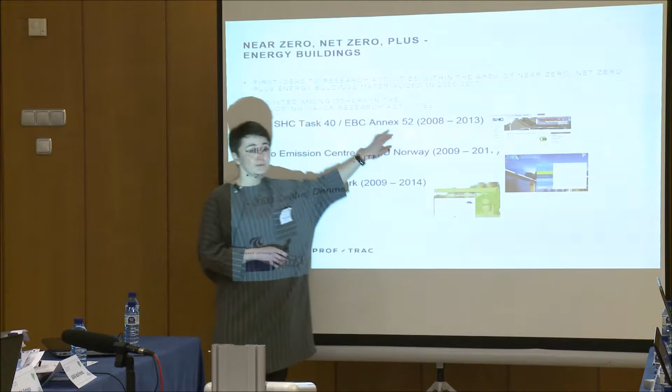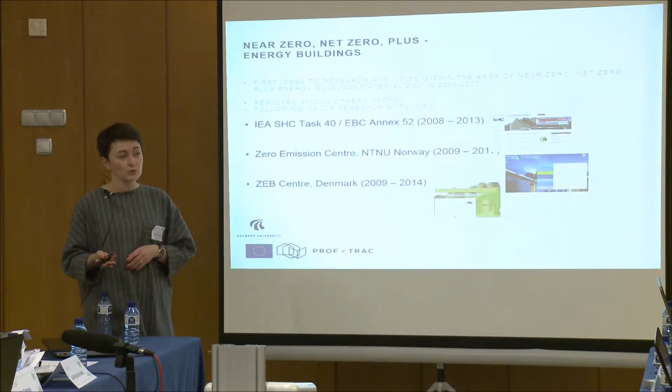In this annex, one of the questions raised was: what do we understand as a nearly zero energy building? We can speak of many different types of buildings that produce renewable energy, whether electrical or heating energy, and can we compare those? What do we understand by zero energy building? How close to zero should we be? Is it a building that produces energy, or a building that doesn't use any energy? Is it a building producing energy on site, or can we count energy produced by a windmill placed somewhere far away in the fields?

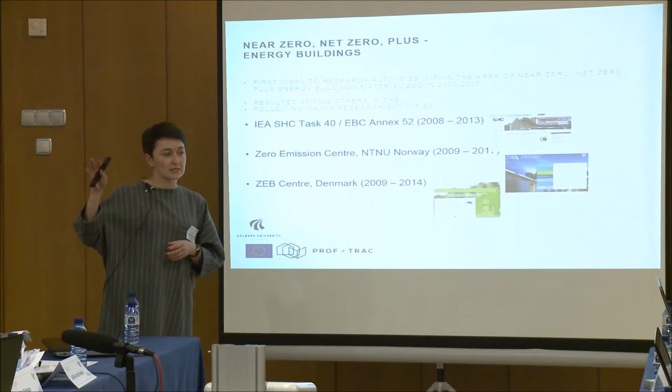Many of those questions were asked within this Annex 52, and one of the outcomes of this work was to make a definition of nearly zero energy buildings.

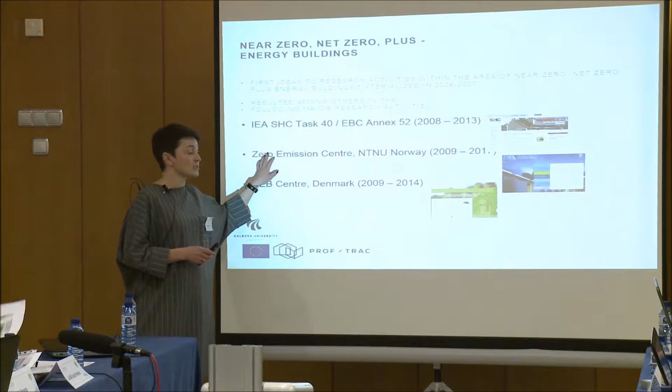As a result of this work, we started a collaboration within the Zero Emission Center in Norway. This center started in 2009 and is still existing, but it will finish in 2017. A corresponding center for zero energy buildings in Denmark also started in 2009, but it's now closed, since 2014.

The difference between those two is that in the first one, the focus was set more on the zero emission center, so we speak of the emissions of the building. In Denmark, we have been focused more on the energy.

In this case, in Norway, are all the buildings near zero? No, not because all of the buildings are nearly zero, although this is the goal. But if you use the electricity in Norway, they don't have CO2, it's hydropower.

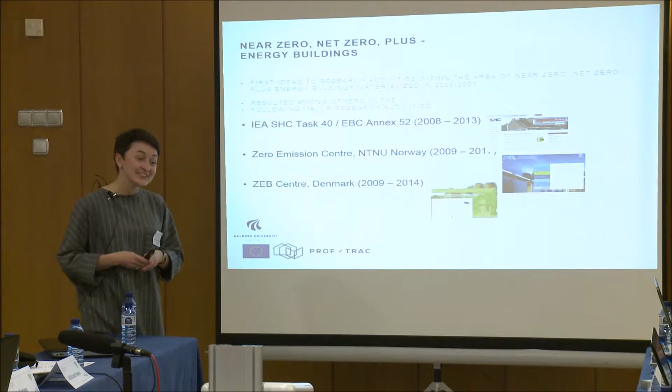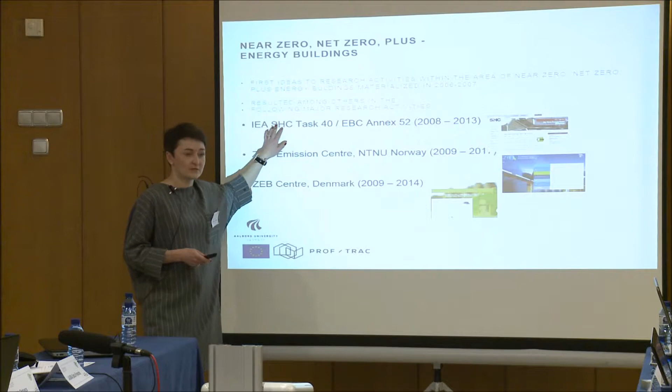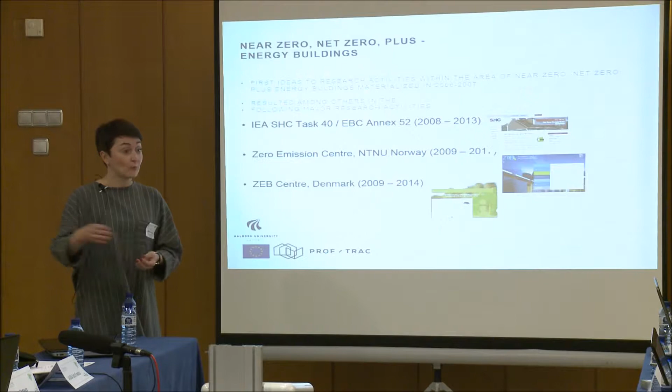Yes, that's true. But the question is whether a building that has huge energy spendings can be considered a nearly zero energy building, although you compensate for all of the energy by renewable sources. This is one of the discussions held within the annex, and one of the conclusions was that a building with high energy spendings is not nearly zero energy, even if you can compensate for all the energy you spend.

So the idea is, what do we need to do if we want to get a nearly zero energy building? First of all, we would like to reduce the energy need in the building. Then, in most cases, we will still have some energy spendings, and those have to be compensated or produced by renewable energy sources.

And then how do we cover, how do we compensate? If our building uses, say, 10 kilowatts of electrical energy, can we compensate with heating energy? How do we deal with that? So we need to find a way to account for the energy. Do we account by primary energy, by electrical energy, or what is the other way of accounting for the energy?

And finally, we also need to consider the embodied energy in the materials of the building that we use. How do we deal with this part of the building?

So once we succeed in building these nearly zero energy buildings, what we get is a building that has rather low energy use. We have buildings that are consuming some energy, and in many cases that would also be a building that is producing energy, what we call the prosuming buildings.

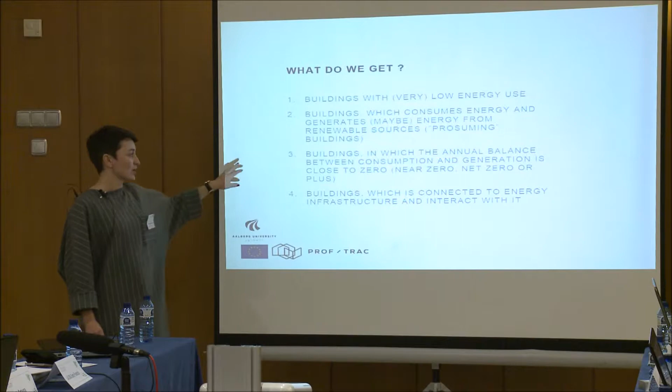We also get buildings where, expectedly, the annual energy balance goes nearly to zero. This annual energy balance is the outcome of Annex 52, that when we account for zero energy buildings, we account on a yearly basis. We could have considered accounting on a monthly or daily basis, but the conclusion was that the yearly basis was the most appropriate way of accounting for the energy.

Can we interact with it? But I think we also have to speak about power, peak power. Yes, yes, also that one. But I think we will discuss it to some extent.

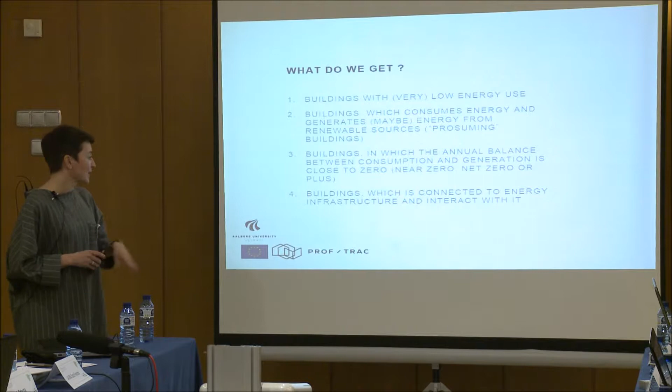And the final part here is that if our buildings are prosumers, producing energy, there are two possibilities: either it's a building disconnected from the grid, or it is connected to the grid. If our building is connected to the grid, then it becomes a very important part of the overall energy system, and we cannot discuss a building as a standalone unit. In this case, we'll have to discuss the building as part of a larger interface.

The challenges related to zero or nearly zero energy buildings are: how do we determine the balance between energy production and energy savings, and how do we deal with that? How do we design buildings that interact effectively with the energy system and the network, and how do we design buildings that can help our energy grid? What do we understand by that?

We actually want our buildings... it's not a fire alarm, I guess. Oh, it's done now.

Another aspect of all of this is actually designing our buildings to be energy flexible, so that our building can take some of the load from the energy grid, and in this way release certain possibilities such as energy storage.

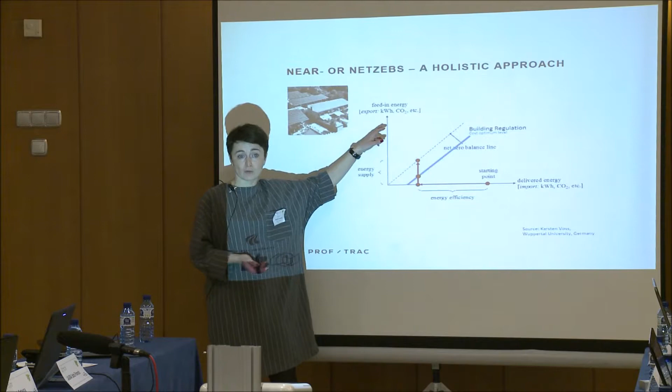This is a discussion we've had just before, where on the x-axis we can look at the delivered energy, or the energy demand of the building, and on the y-axis is the production of renewable energy on the building. So in this case, if energy use in our building is rather high, that would also mean the production of energy should be correspondingly high. If we optimize our building and reduce the energy demand, we will end up with rather small energy production.

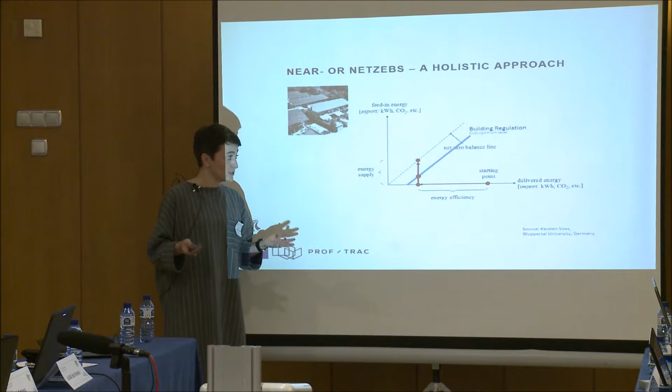Of course, we don't do this because it would be very difficult to compensate for the high energy demand, as it would be quite expensive. In some cases we do, but that's not the optimal situation.

Studies have shown that it makes sense to optimize the building to a certain level before we apply renewable sources. For the example of Denmark, it's set by the governmental building regulations, where a certain line is drawn that defines the optimal life cycle cost, or investment cost, for consumers to go for this level.

So we optimize to a certain level. We are not going all the way to zero, because if you go all the way to zero, it will be quite expensive. But if we stop at a certain reasonable point, then with a reasonable cost we can optimize our building and compensate for the energy use using renewable energy sources.

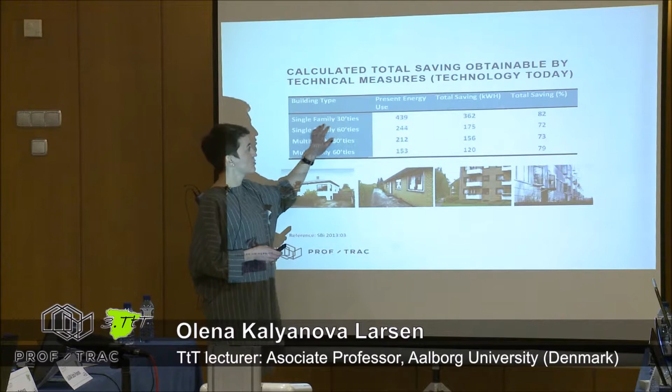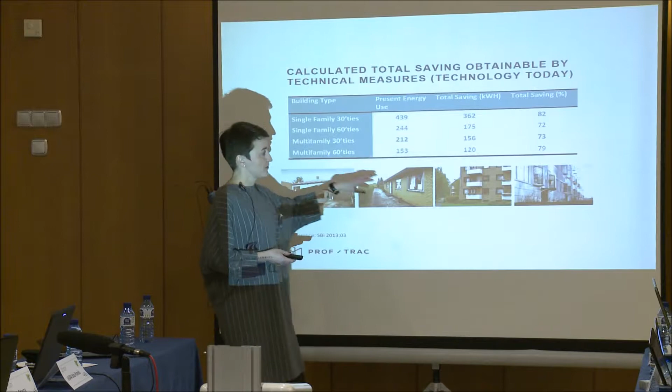Looking again at the Danish example, we have a lot of different buildings from the 30s, 60s, and 80s, and some calculations have shown that if we look at single family houses from the 30s, we can expect 82% energy savings if we renovate those buildings. The value is very similar for buildings built in other years. For example, buildings from the 60s are also very poor, and they can be optimized and renovated.

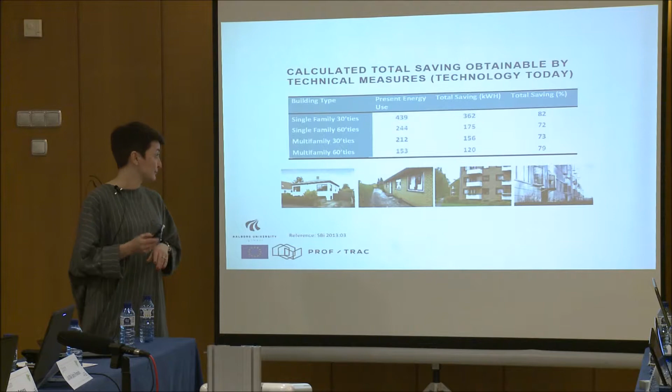Oh, this is not very good. Then I'll try to explain.

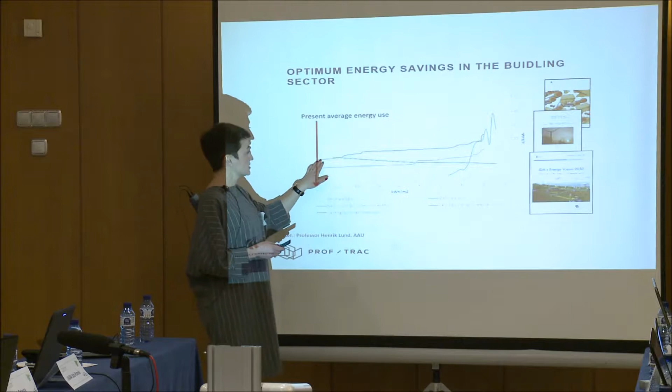At the moment, a lot of buildings in Denmark use around 130 kilowatt hours per square meter, shown by the orange line with a certain cost. If you look at the new built buildings, that's the green line.

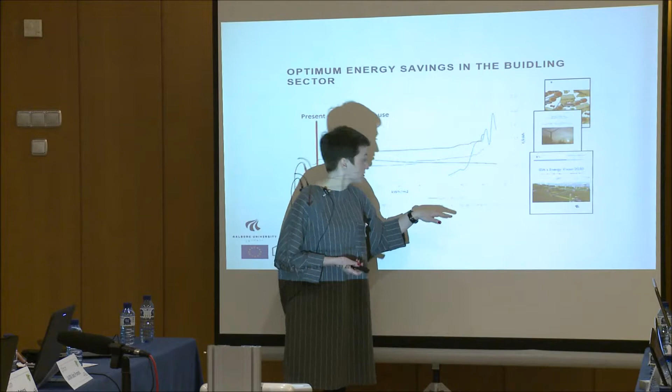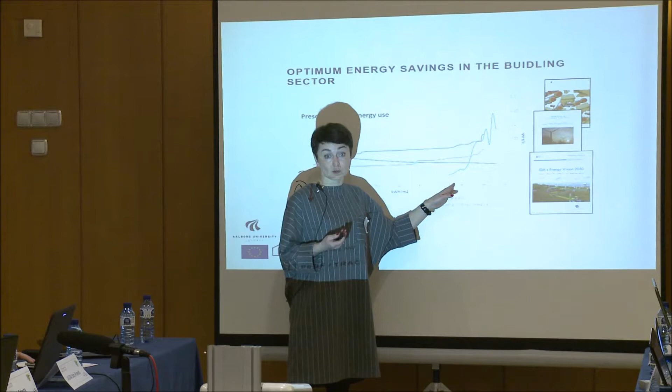There we start with energy use at around 70 kilowatt hours per square meter, and we can see the new buildings are rather cheap to build to achieve this low energy use. But if we follow the Danish regulations, which have been sharpened...

The expectations for energy use in buildings are now very, very low. So we have to optimize our buildings even further. Right now we are at around 20 kilowatt hours per square meter per year. But this doesn't come without a cost.

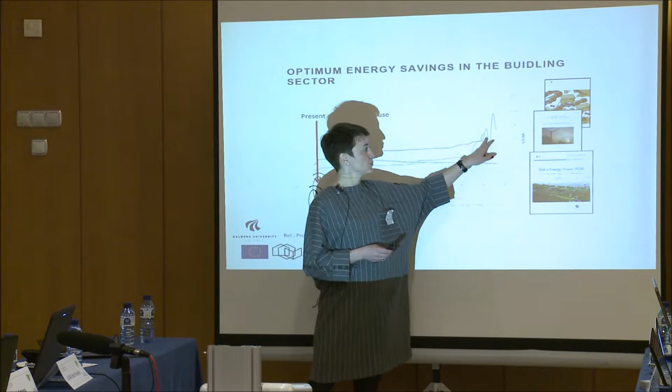You can see those peaks where our buildings become very expensive to build. This is because we have to use mechanical ventilation systems with heat recovery, which has a certain investment cost.

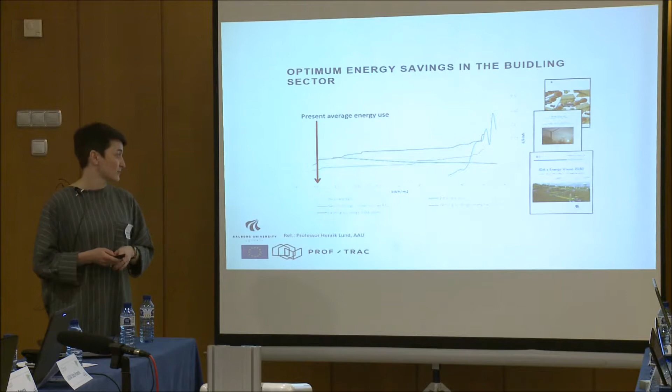This is an example of a case study, a building that had to be built in the city where I live. This was a building disconnected from the grid.

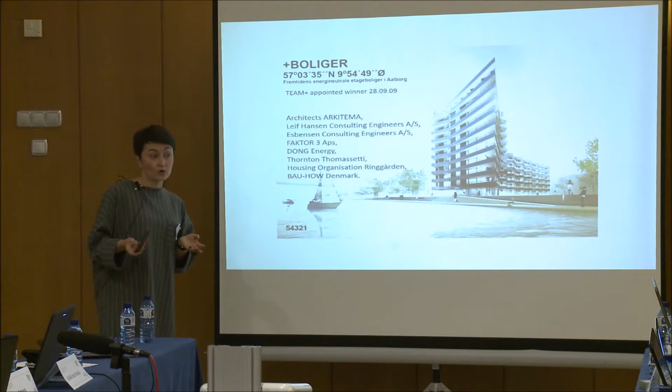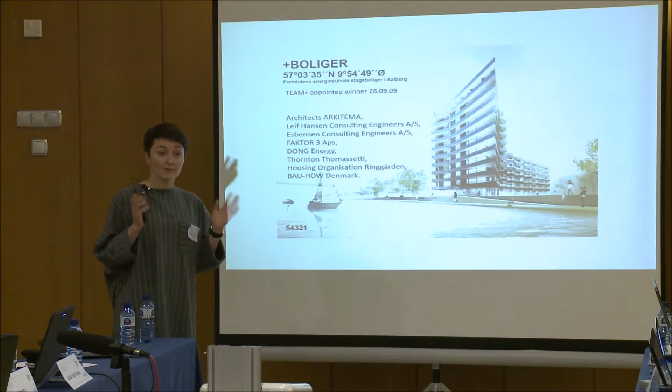Before they decided whether it had to be disconnected or connected to the grid, they did a study on the life cycle cost, whether we take different renewable sources and make the building fully autonomous, or whether we connect it to the grid.

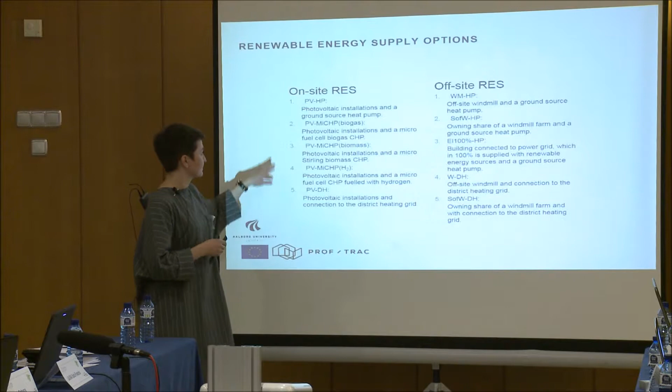Can you explain the different technologies? Those are over here, and they're also on the USB. But if you're interested in more detail, since this isn't work I did myself, there is a publication reference here that's already published, so you can have a look at it.

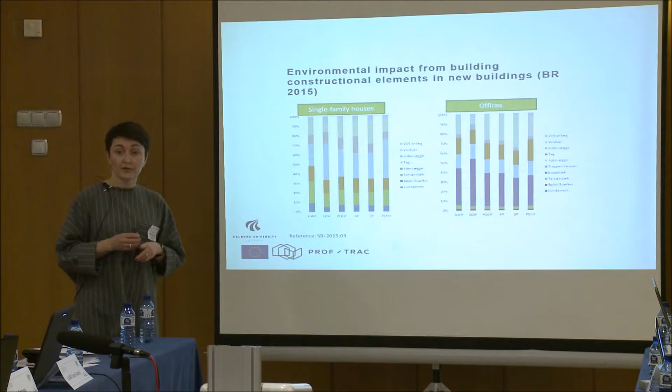Speaking of the environmental impact of our buildings, we can also look at different types of buildings: single family houses and offices. I'm surprised the picture isn't very good, but it worked last time as far as I know. The idea is we can look at the contribution of different building constructions, for example HVAC systems, windows, floors, etc.

Here you always speak about theoretical impact, always calculations. Yes, this is the calculations. No verification side? No, but there will be also some.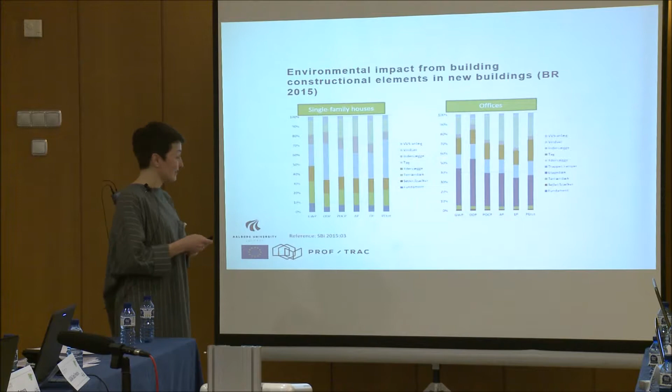In the previous slide, you have a winner. I was trying to say that there is no winner, because it depends very much, since this is done for the Danish context, and for the Danish context, the off-site production, etc.

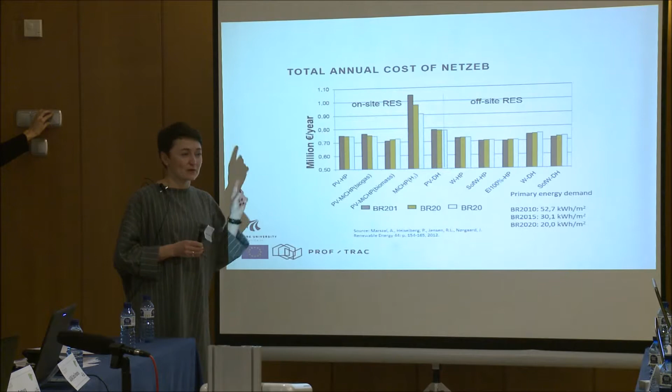Are you coming back to the same diagrams when speaking about the verification side? Not the same, because I don't have them, unfortunately. This building has a very long story.

This building was designed and all of this analysis was made just before the crisis. When they had to start building it, the crisis came and the companies involved simply could not afford it. So construction was cancelled, and now, many years after, they are building this building, but the site has moved to Copenhagen instead of Aalborg, in a few years.

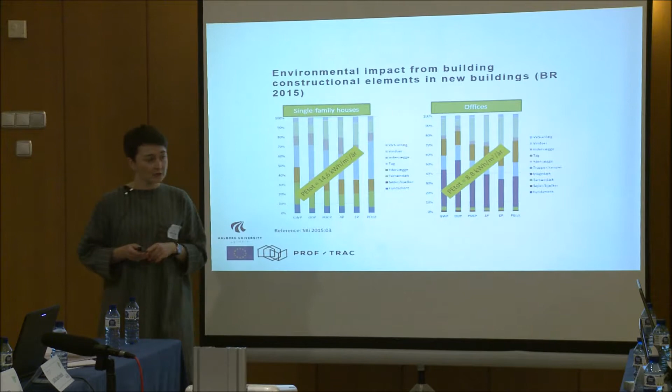If we look at the primary energy in total, we have the single family houses and the offices. The life cycle cost in the calculations for the single family houses seems to be much higher than it is for the offices. And that is one of the calculations made within this project.

And we do have to consider the life cycle cost. But as I said, the ZEB, or Zero Energy Building Center, has not been focusing in Denmark so much on the emissions. Sorry, here, when you speak about those numbers, are you talking about primary energy, electrical energy, or thermal energy? Over here is the primary energy for the life cycle cost.

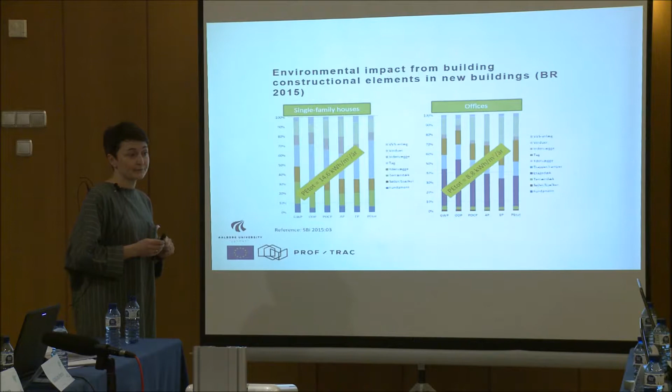And is everything included, for single family house - lighting, appliances, everything? In this one, as far as I know, appliances are not included. No appliances? No. Lighting? It's also still counted as appliances for the dwellings in Denmark. Yes, and this is, yes.

Some of the other challenges that we are discussing is actually how the buildings interact with the energy systems, if they are a part of the energy system.

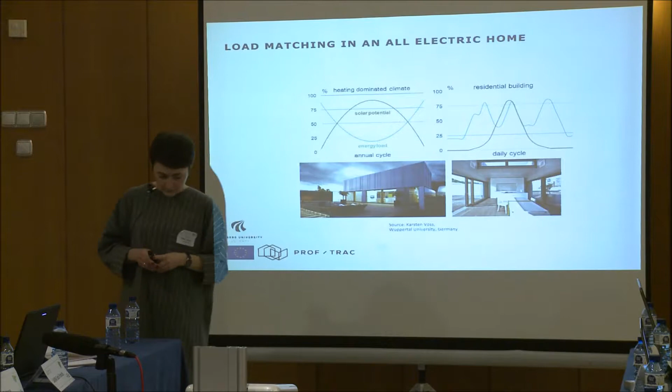Some of the calculations that have been done in a fully electrical building show that the building's annual cycle can look this way - we can actually produce quite a lot of energy in the summertime using the PVs, but actually the energy load in the summertime is reducing. But if you're looking at the photovoltaics on a daily basis, those are much better correlated to our daily cycle. Maybe not for the single family houses, but generally for the grid, the highest energy demand happens during the daytime, meanwhile at nighttime we are not consuming.

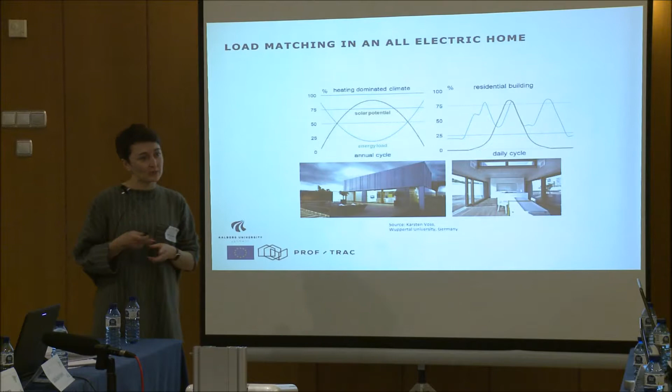Yeah, the business hours, of course. But in a certain way, if we speak of a building that is fully electric, we can compensate both for heating and cooling using the electricity, if this has to be considered.

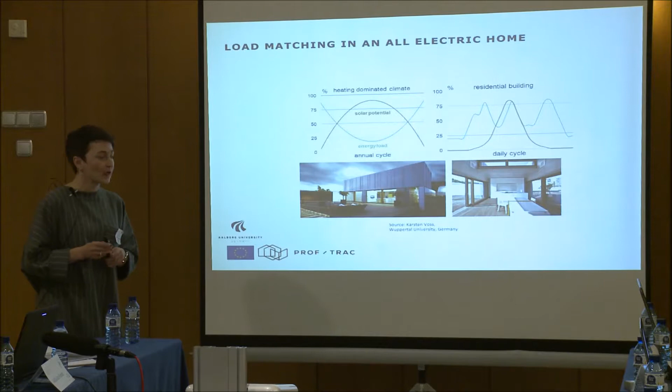This is one of the case houses which has been started by Karsten Voss from Germany. I think this illustration can apply for many places. And this is the case that I can speak more about.

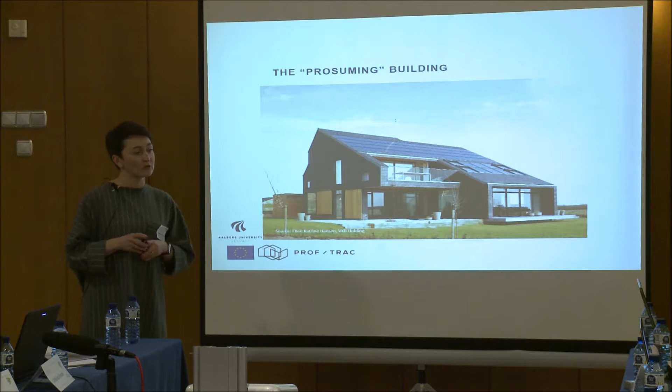This is the building, I don't know if you have seen it before, it's called Home for Life, or in Denmark it's called Active House. It's in a way a research project which is a collaboration between the industry and the universities.

This building was built some years ago, and the idea with this building is that it has a lot of glazing area, of course. It has a lot of control systems involved, so the occupants, when they live in this building, don't have to control a lot of things.

So the shading is activated according to the indoor air temperature and according to the daylight level inside. It is highly controlled, and some people who have been there think it can be too much, because you can feel how the internal shading moves, the external shading moves. But this building has been measured in many ways.

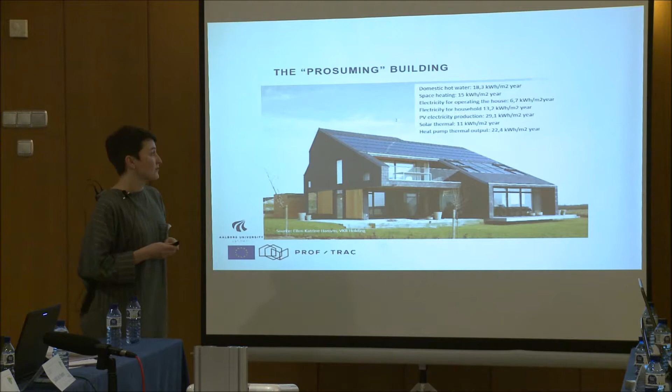So the calculation for this building has been made, and we have a certain demand for the domestic hot water, we have the demand for space heating, there is electricity for the operation of the house. Household electricity, in this case, is included, and we know about that one.

There is a production of electricity by the PVs. There is a solar thermal collector installed, and there is also the heat pump. So once the measurements have been done, we have the solar thermal collector, we have the photovoltaic system, and we have the ground source heat pump.

The building is connected to the grid, and actually two out of three parts of the energy has been, let's say, exchanged with the grid. These are the results of the measurements.

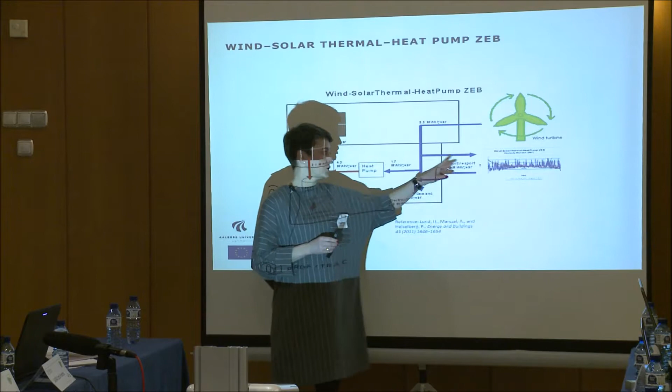Then some simulations were done to calculate what will happen if the solar collectors are replaced by a wind turbine. In this case, the calculations showed that the energy exchange with the grid dropped two times. As a result, for this building, the conclusion was made that the wind turbine is the better solution for this type of building. But this is, of course, only one case.

Yes, I know that there is a better picture of this chart on the USB.

Some of the discussions that have been made relate to wind generation, because when we generate electricity using wind turbines, we have very high fluctuations in electricity generation. Meanwhile, having solar collectors, we actually produce energy during business hours, where it is also most requested, at least for the Danish network.

One of the things that is very difficult to discuss is that we are used to looking at our buildings as a singular, standalone system. But if you connect them to the grid, they actually become an active part of our network. At least for Denmark, this has been one of the conclusions.

I'm not researching in that area particularly, but we have very good cooperation with another department that researches the network of the energy system in Denmark. They have been looking at the building as part of this active system, so actually we can use the building as a battery in a way.

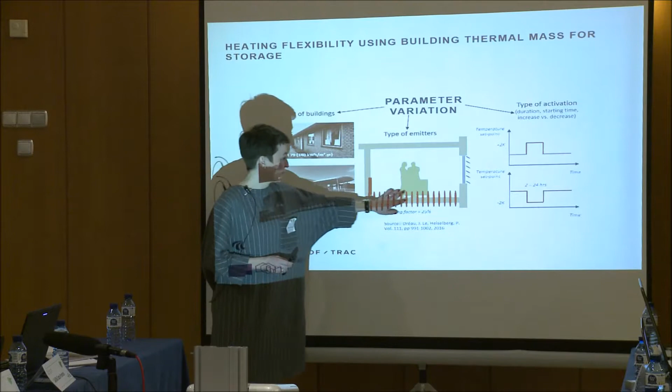So when we did the study, something happens with these charts - they change. What we are looking at is the building as an emitter or a collector, actually using the building construction as a possibility to collect energy.

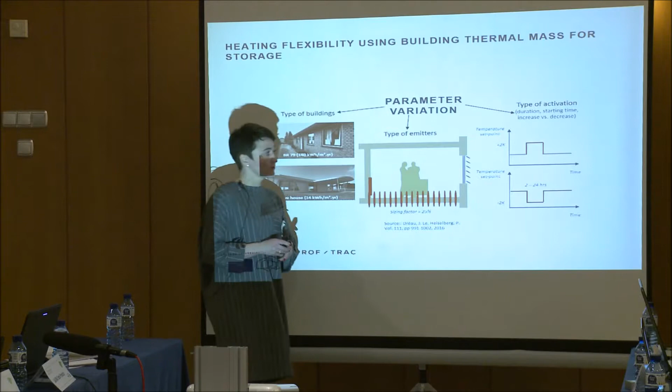This can be done by increasing the set point temperature inside the building at moments when energy is cheap, and reducing the set point temperature when energy is expensive. So when energy is cheap, it's actually the situation when we have too much energy in our network, and that has to be spent.

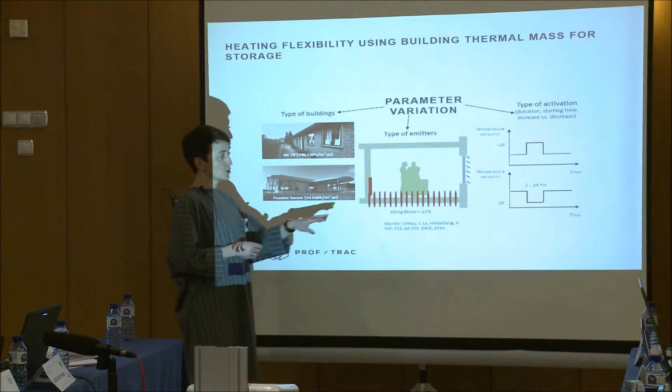And this is what we do - we ask our building to use the energy at this moment to maintain comfort conditions. Meanwhile, when we are not using the energy, we are also saving some money.

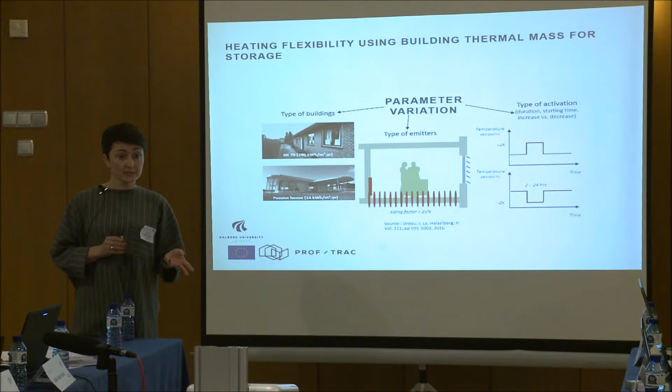These are the results of building simulations, not measurement results. We are looking at two types of buildings. First, a building built sometime in the 70s or 80s - this building has a very poor building envelope, with a lot of cold bridges, etc.

The other building case is one that lives up to the passive house standard, a building that has very low heating demand and a very good building envelope. Those are the two cases considered.

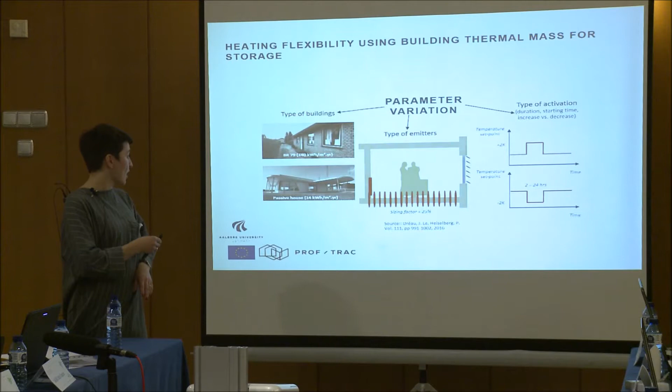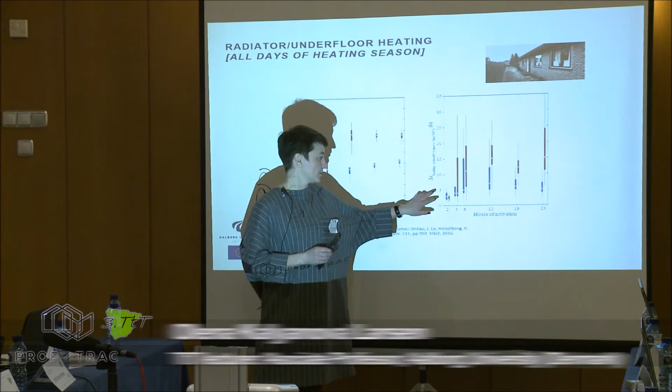These are the results of the simulations, and now I don't have my notes. We are looking at red and blue lines - the blue ones are the radiators, and the red lines are the floor heating. So what happens if, on the x-axis, we activate our floor heating or radiator for certain hours in order to store some energy inside the building.

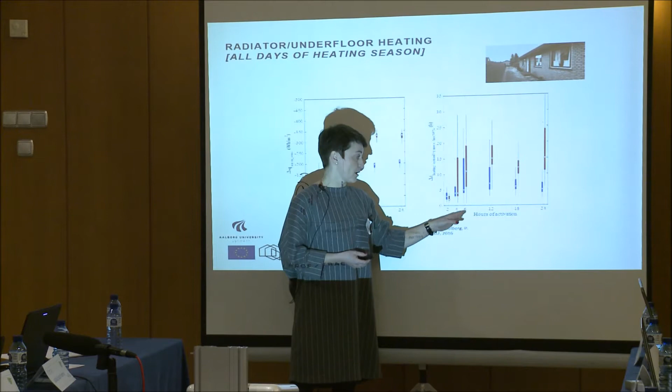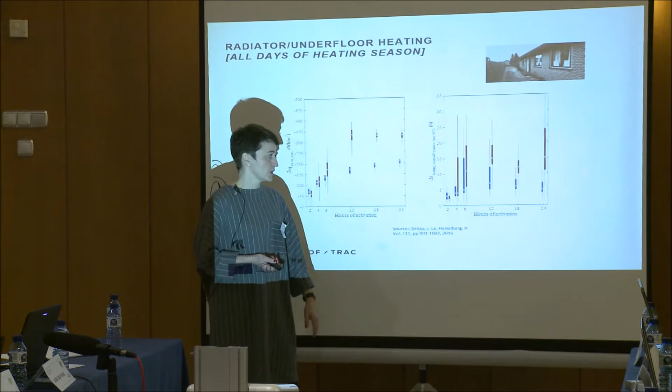For this old building from the 70s, if we activate the thermal mass for around 6 hours, we can see that the heating system can be switched off for a maximum of 5 hours. So actually we do not get much out of it. If we activate the thermal mass for a longer time, the performance - the time we can switch off our system - doesn't get much longer.

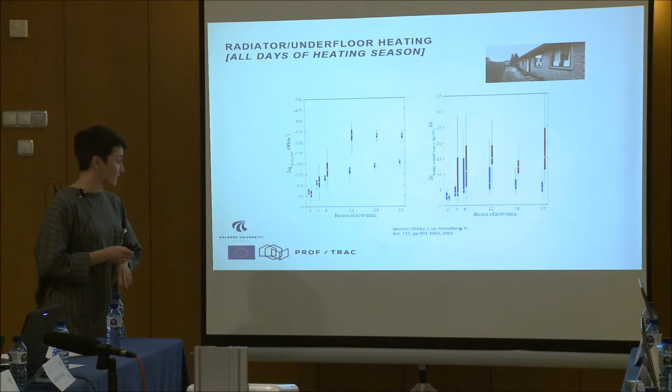It's very difficult to present this way, but this is the result of the simulations for the well-insulated building according to the passive house standard. Over here, as far as I remember, around 100 to 200 watt-hours per square meter can be stored in our building.

Although the building can store very little, the time it has been storing energy can go up to 24 hours. So, well-insulated buildings are much more autonomous, and by this means they could be used in a better way as an energy storage.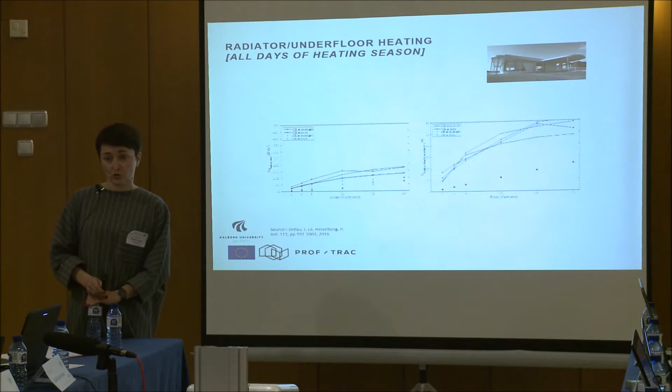If you look at different scenarios for how we can use our energy system, we can look at different solutions - what if we switch off our heating for 4 hours, or for 6 hours? There could be some flexibility factors defined.

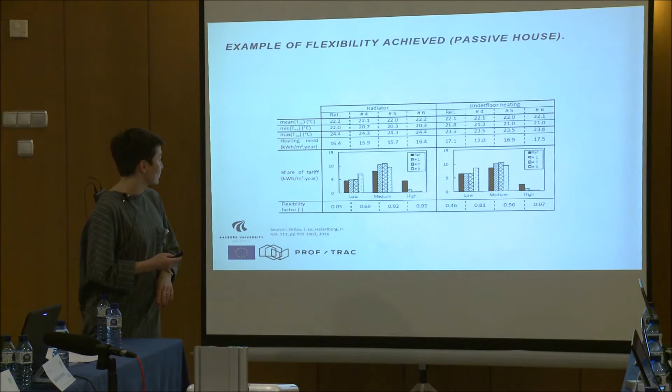But since it's very difficult for you to see the previous graphs, I'm not going to describe it any further because it doesn't really make sense, so I'll just pass over those. If you're interested to know more about it, there is a reference, so you can read the publication on the Web of Science.

This is another challenge that we are going to discuss. These are the measurements that has been done in Denmark.

I totally agree that a very good indoor environment can also cost you quite a lot in terms of energy. But it can also be the situation where we have poor energy performance and poor indoor environment - we totally agree about that. This is only the energy results based on the energy labeling in Denmark.

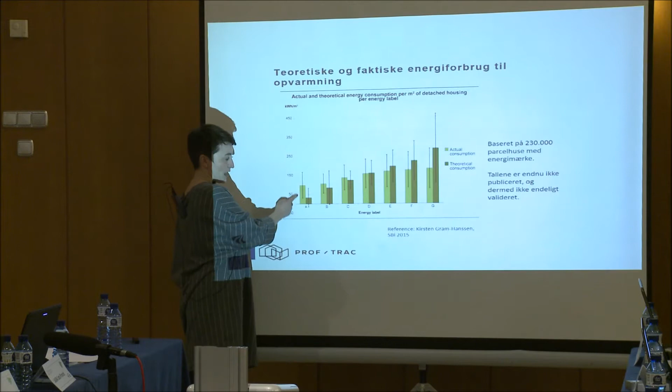The positive side of this chart is that it's based on a huge amount of data - 230,000 buildings. That's on the positive side. On the negative side, the data is achieved from the energy labeling, meaning the data is not very detailed, so there could be deviation. But the issue of actual performance compared to the calculated one is very well illustrated here.

The one over here is the 2020 label. If you compare with the passive house standard, it's a little bit different - there are different requirements. In Denmark, by 2020, the maximum energy use is 20 kilowatt hours per square meter per year, excluding appliances for the dwellings - appliances are not included. Also for the offices, but for offices the lighting is included.

The reason appliances in Denmark are not included is simply because this is legislation, and the government does not believe they can require people to have a certain type of fridge or washing machine. But in a way it illustrates the problem that we do not know much about our buildings, because in the building regulations we only require the energy - we only advise what indoor environment we want to have.

It can save some money as well. And people living in well-insulated buildings are not taking care of it as they should. But there are... let's continue from here.

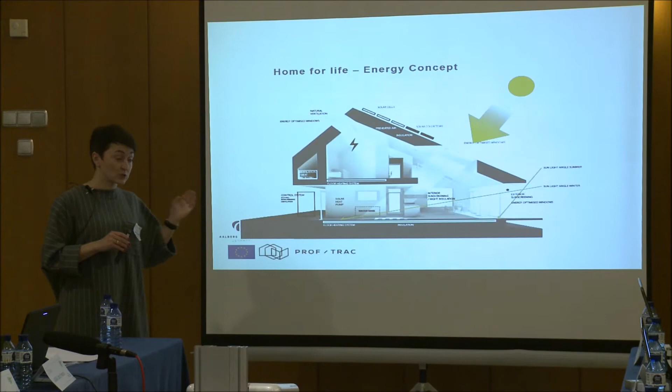This is the building you have just seen before. It has been standing empty for 2 years, and they were controlling and measuring how it operates without interference of users. Then a family moved in and lived in this house also for 2 years, so its performance has been documented for 4 years in total. Now the building is sold and is no longer being measured.

The outcomes of this study were that the energy used for heating was higher than expected for the building. The electricity used for the heat pump was also higher than expected, and the electricity used for the control system in the building was also higher than expected - this is an expense that's very often forgotten, because those systems require quite a lot.

On the other hand, in Denmark we do include domestic hot water in the energy requirements, and here the use of domestic hot water was much smaller. This has something to do with our assumptions and our knowledge regarding domestic hot water use - we don't know much about it. But it also has to do with the actual occupancy.

This is a building for a normal single family, with 2 children and 2 adults, and this is what it was accounted for. The electricity used for appliances and plug loads was also lower than expected, and I will say the expectations were set very low, so this family didn't use much in general. Only the production of the thermal system was as expected, as well as the PVs - those are the systems we could count on.

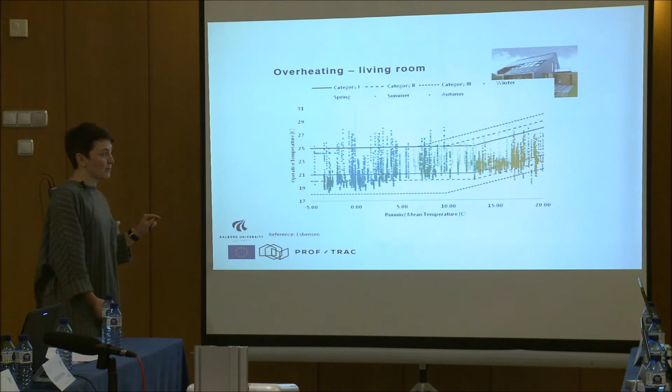These are the measurements of the operative temperature in the building within a year, and on the x-axis is the outdoor temperature. What you can see here is that while the outdoor temperature was reasonably low, we had variation within the comfort level. For some cases the temperature in the room was lower. With high outdoor temperature, the temperature inside the building was increasing.

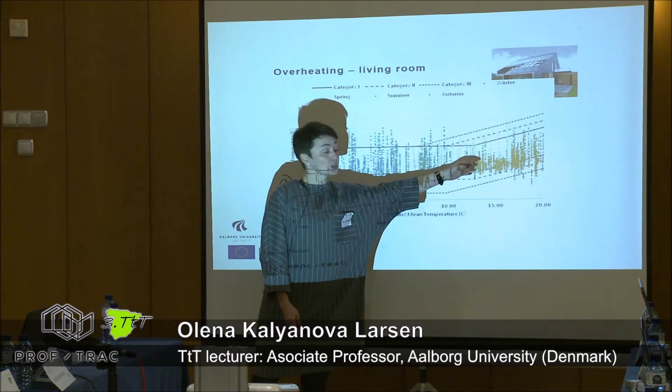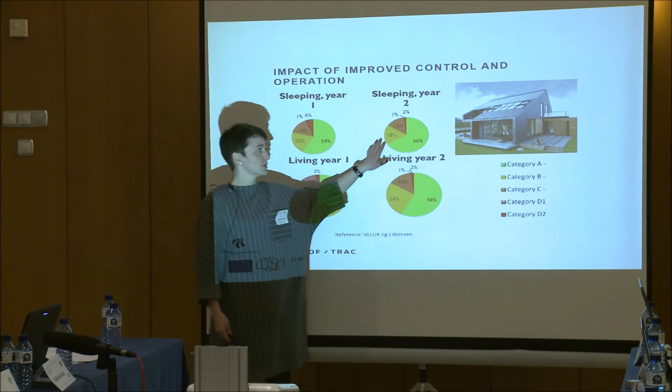If we plot those results in pie charts, you can see that for the first year, the comfortable environment of the building was experienced for 59% and 20%. For the next year, once we learned more about the building performance, the indoor thermal comfort improved. The green and orange represent good performance of the building.

Were there some interaction actions? No, this is without people, just results. Year 1 and year 2 are with people, with the family living in. You can see once the people moved in, the indoor thermal environment had been reduced significantly.

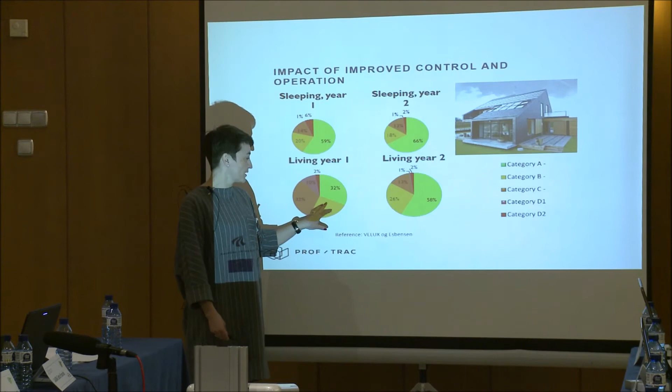So the comfort period was much shorter. For the first year, once they learned how to live in the building and deal with all the systems, what we normally experience, in year number 2 the comfort level of the building had significantly improved. This is improvement by the occupants learning how to live in this type of building.

I must say for myself, I'm also living in a similar building, same as my neighbors. All of them complained quite a lot for the first year because it's been very, very hot in their homes. After some time, they learned how to deal with their homes and now there are no complaints. It's all very well, so we are learning.

So this is something to consider: maybe it's not so easy for us to reach our goals by only improving the building envelope, or let's say building insulation and the airtightness of the building. We have to deal with the occupants.

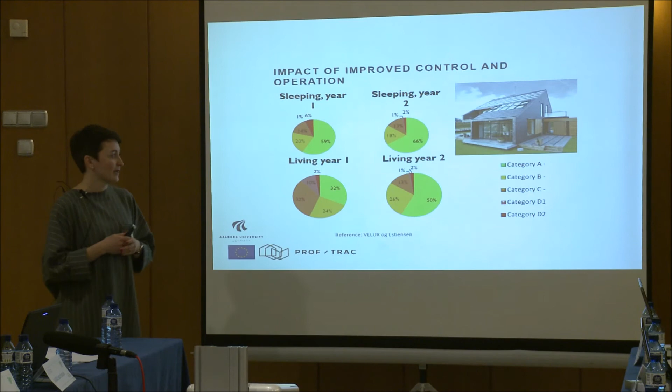It's been, but to a larger extent because of the woman who lived here this year - she was on maternity leave. You can see there are quite a lot of windows and no trees around, so anyone passing by could see her breastfeeding. So she had to shut the windows with curtains for longer periods. That was one of the issues here.

So the thing to say here is that besides having those very robust systems in our buildings, we actually have to work with the systems that are controlled - that's demand control ventilation, shading control, lighting control, etc. Having those controls is a sensitive matter because they are not so robust and they influence building performance quite a lot. This is what we have not been working on as much.

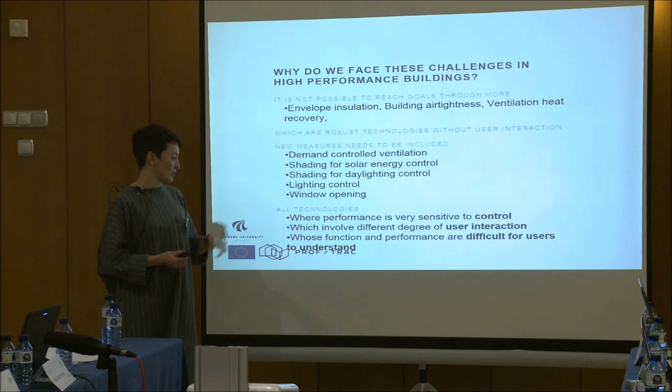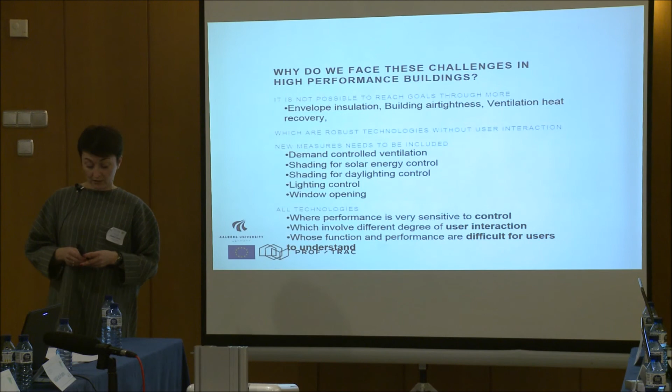In this building is an example where it has been demonstrated that it is very sensitive to the control, and the user interaction had quite a lot to say for the final energy and comfort performance.